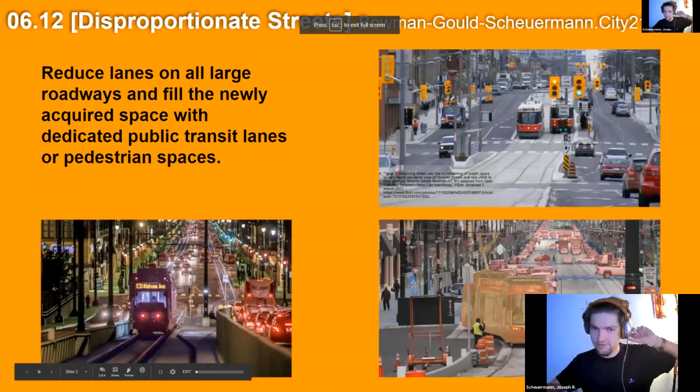Our action statement is to reduce lanes on all large roadways and fill the newly acquired space with dedicated public transit lanes or pedestrian spaces.

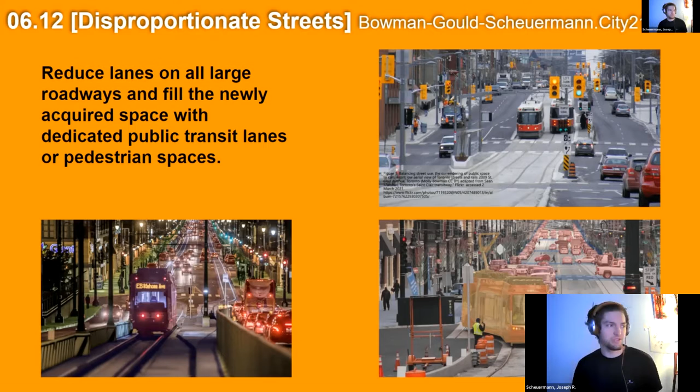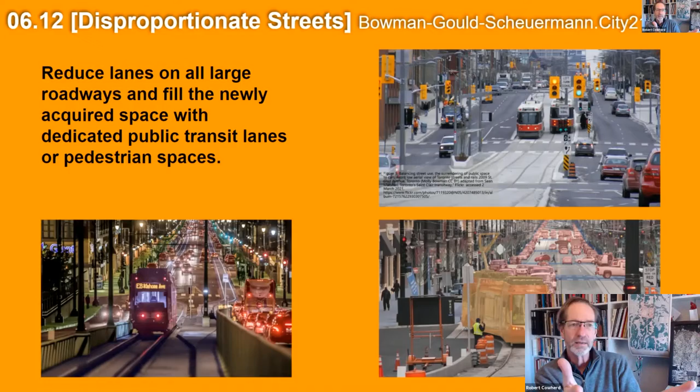Within our analysis, we looked at a bunch of items in the United States and basically noticed... Now you can move on, okay, this slide did its job. We're looking at the evidence, we're looking at the action statement, and it's starting to make sense, but now go deep right away. Okay, got it.

The continued surrendering of public space to cars results in more commuters on the road and decreased pedestrian zones. So when cities prioritize road space and area to vehicles, sidewalks and crosswalks are narrowed to allow more space for the car.

Public transit is great because it allows for more significant numbers of individuals to move through these areas. But when roads are not designed effectively, buses and trolleys with dozens of passengers are stuck in the same traffic as vehicles with one passenger.

To address pedestrians' needs, it's really important to keep them in mind while designing roadways such as these. So my question is, how do we apply the most suitable ratio of sidewalks, streets, and rails to these urban areas?

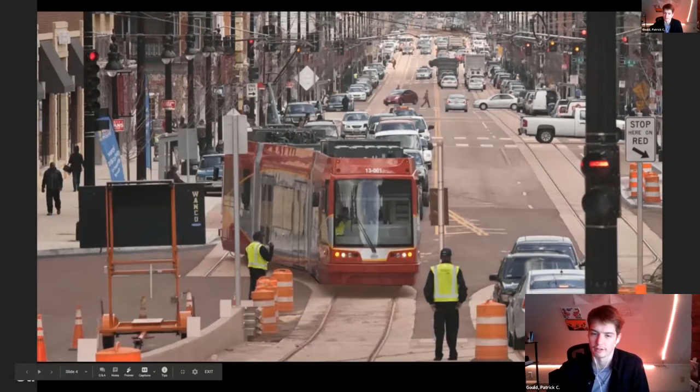And then for mine, I wanted to highlight the width of the road within Washington, D.C., and how the trolley starts to merge within the traffic with cars.

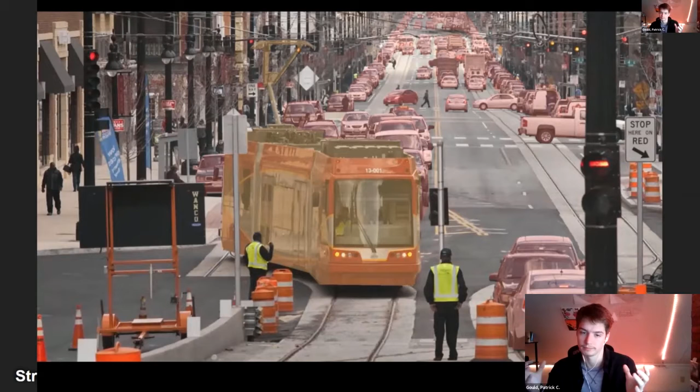There's a high cluster of cars within these roads, kind of pushing all of the people to the edges of the road for traversing, with the crosswalks connecting them.

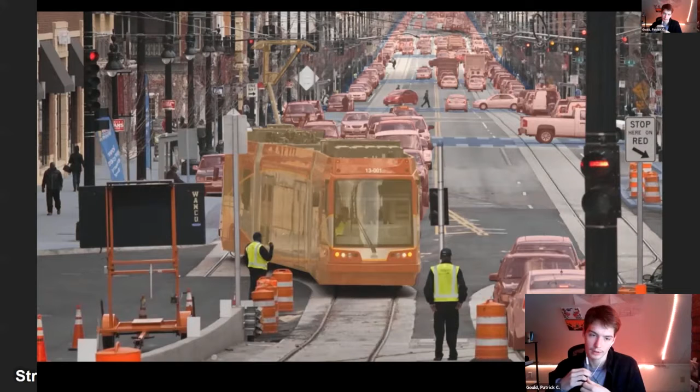Right after this, I highlight that there's no barrier between the two. The greenery and vegetation is kind of gone due to the season, but there's just not a lot of it, so it makes the experience for the passerby less likable.

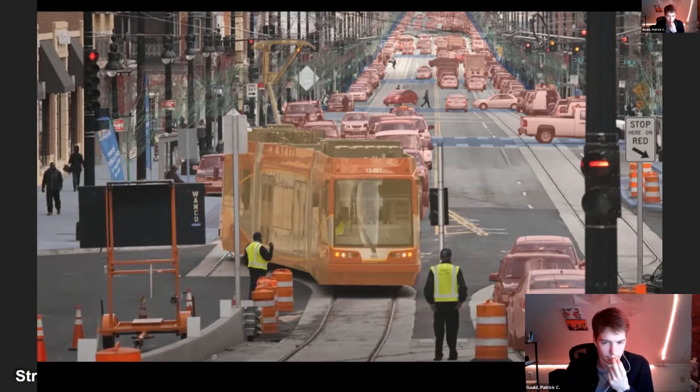So now do we explain this or do we slow? Well, at this point, it's appropriate to say something—not just restate your proposed action step, but somehow in one sentence capture some of the complexity and challenge. Maybe refer to one or both of your questions. Does that make sense?

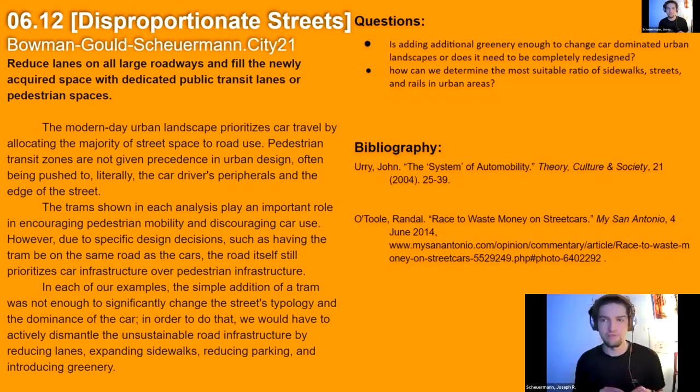I guess one sentence would be that we think it's probably not enough to just introduce trams to roads, but to actively dismantle unsustainable infrastructure, which would mean reducing lanes on roads, increasing sidewalks, and introducing greenery.

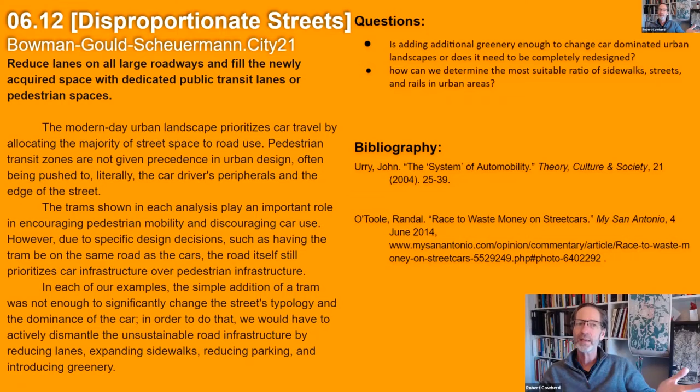So what I'm hearing you say, between the internet cutouts, is that it's not just adding public transit, it's the design of the street space in an integrated manner. So it's a design—so basically hire an architect.

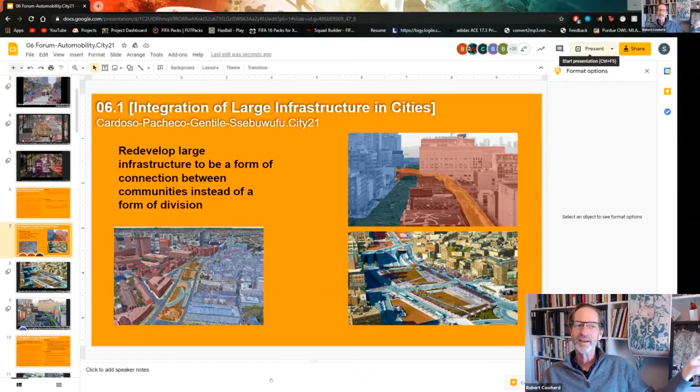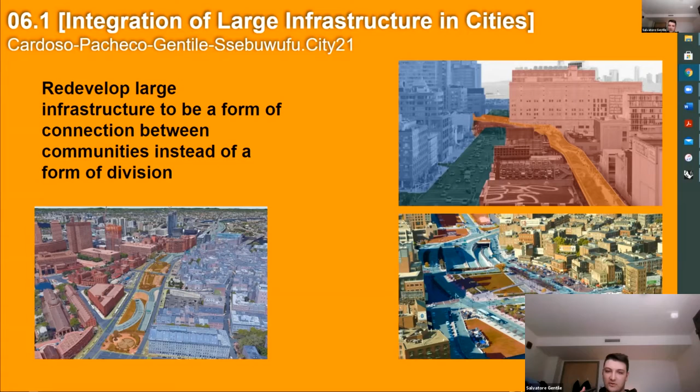So we talked about—go ahead. All right, so we discussed the integration of large infrastructure in cities. Basically, what we are arguing and advocating for is the redevelopment of these infrastructures to be a form of connection between the communities that were once divided.

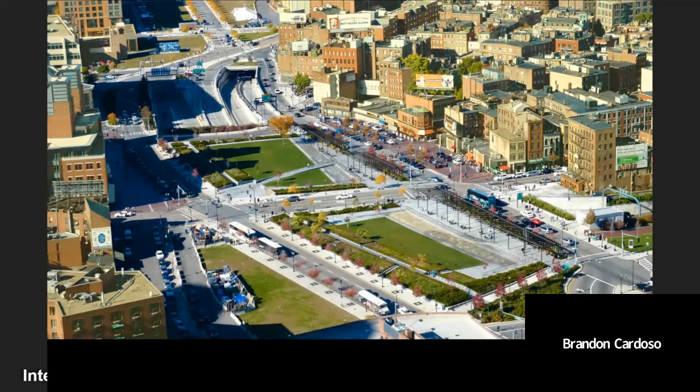So we looked at the Rose Kennedy Greenway for one of our examples, and looked at how it was originally a large central highway that divided the communities within the city. But by placing the highway underground, it allowed a lot of spaces on the upper level to become open public spaces that allowed for a lot of interaction with the people of the city.

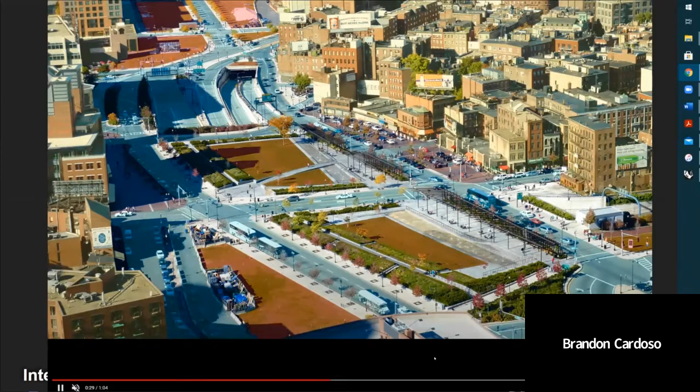This greatly increased the walkability of the site, which promoted a lot of interaction within people, and this all helped to reduce the congestion of automobiles on the streets of the city.

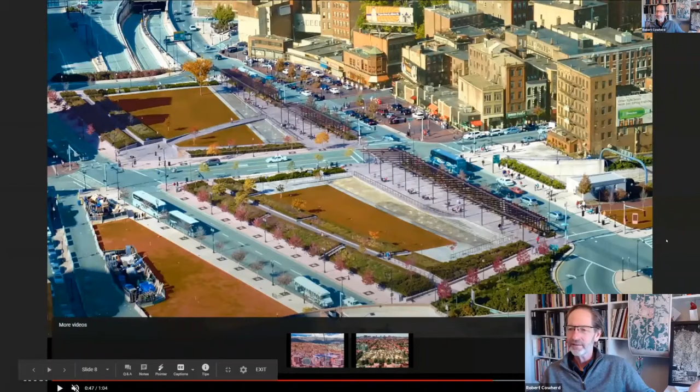Wait, he's cheating, he's zooming in. That is so effective—if I knew I could do that, I would have done it. Can you zoom in? Is that allowed? Yes, yes—one of the reasons we like high resolution images. Well done, Brandon.

Josh, for my video, I looked at High Line Park in New York and how its revitalization brought in new growth to the city in this particular area.

It's moving so slow. Can you move it to like the...

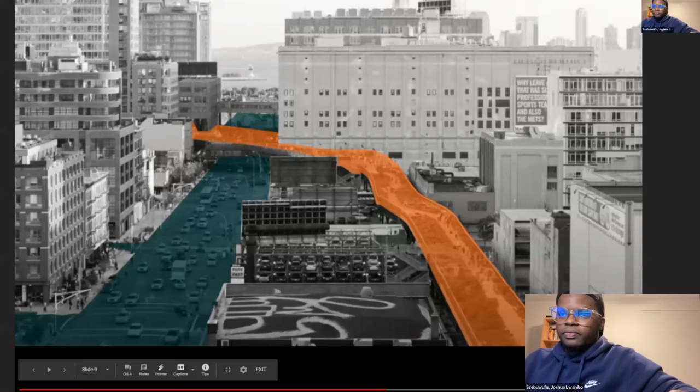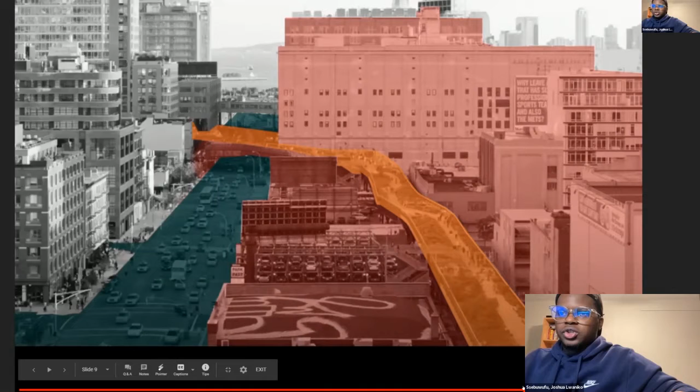So I highlighted High Line Park to show how its revitalization into an urban public park brought an influx of new people and new growth into the city, as abandoned infrastructure of the buildings was redeveloped due to its proximity to the park, into housing that people could go into, as well as new businesses into the area.

Do we get extra points for making 2-minute videos? Do we get double points for 2 minutes? I don't know. No, we actually lose points. It's harder to get it all in 1 minute.

Okay, so to basically sum up, we asked the question: can the redevelopment of these infrastructure projects and new mega infrastructure projects in cities mediate America's dependency on the automobile and serve the community and its environment?

Excellent. Next group. I believe that's us. I'm sure. Colin, you want to start?

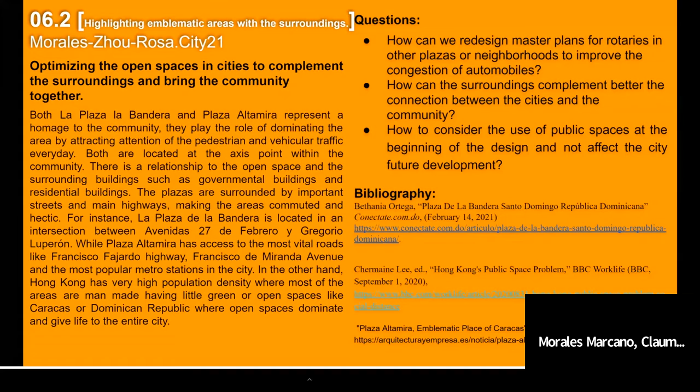Yes, we were talking about how Priscilla and I both have plazas. Hers is in Dominican Republic and mine is in Caracas, and how these open spaces are surrounded by very important highways and government buildings, residential buildings, hotels, and how on the other hand Hong Kong has a very high population density but has little green and open space. So we were discussing how we can optimize these open spaces in cities to complement the surroundings better and bring the community together.

Priscilla, do you want to explain your video? Yeah, sorry, I was muted. So basically this is La Plaza de la Bandera in Santo Domingo. It's like a patriotic monument. I spoke about how people walk into it, or however you drive, you have to actually see the monument, and how the open spaces relate to the monument as well as the government buildings surrounding it.

Doing that. You want to talk about this?

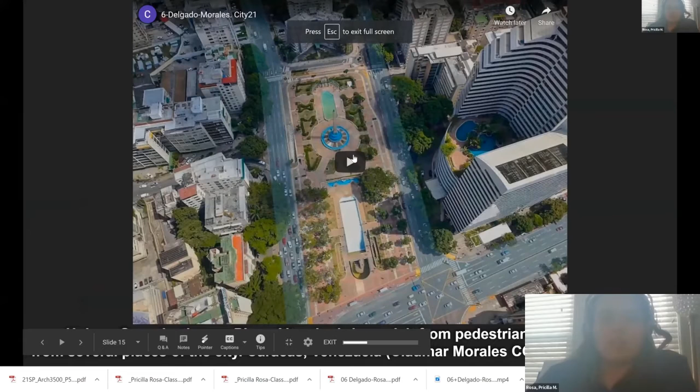Yes, so in my video I talk about how these long streets and highways connect to very important roads and bring pedestrian and vehicular traffic to the plaza. In the center we have the obelisco, which is a very attractive thing in the plaza that brings people together. But the question I asked is how can the surroundings complement better the connection between the cities and the community? Thinking if it's missing a factor, or if the plaza is too big and people need something else to feel attracted to go to that place.

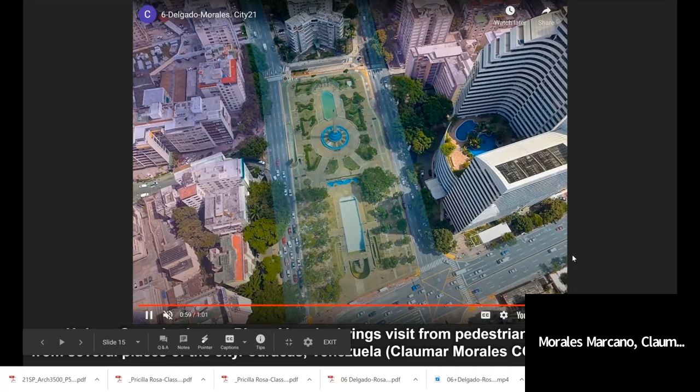I don't know why it's doing this. And lastly, Sharon.

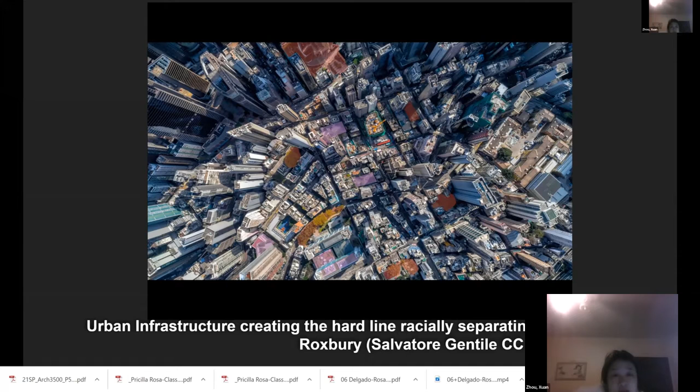My video talks about Hong Kong's public green spaces. You can see the red is provided for the public, and the purple just belongs to personal use. But although you add red and purple, there are just very few green spaces. So my question is: when we design, at the beginning of the design, how do we consider the land for public use without affecting future development?

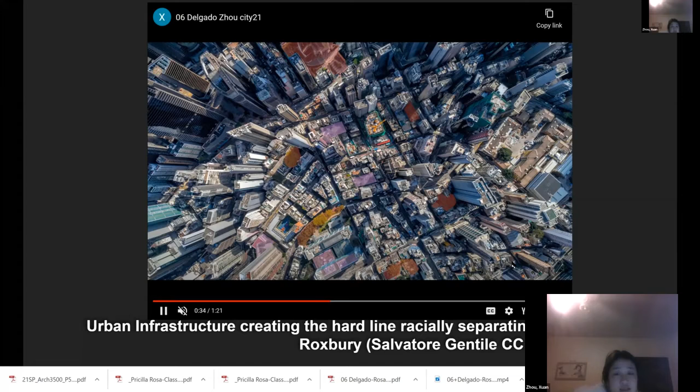Any key question that you three are looking at moving forward to acknowledge the difficulty of this task? Yeah, like how to consider the use of public and open spaces at the beginning of the design, so that it does not affect the city's future development.

Okay, all right, next group. All right. Can you guys see my screen?

So our action statement was to redevelop existing automobile-centered infrastructure with the purpose of creating pedestrian-friendly boulevards.

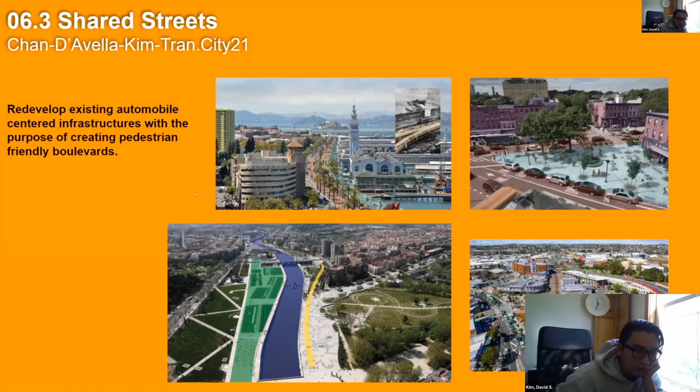This is the city of Madrid, Spain, and what's seen here is that there's a disconnection between both pedestrian and vehicular traffic. So the alternative is to reestablish these areas by converting these highways underground and conserving them to repurpose these areas into public walkways.

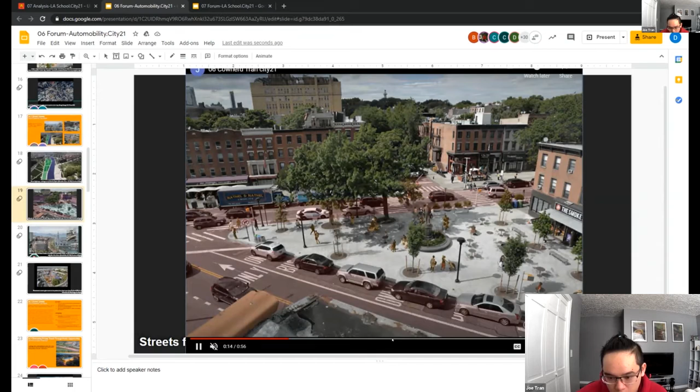This is Fowler Square in New York City. This used to be a really busy intersection with just a small green space. But then they took out part of the road towards the right and gave that to the green space, turning it into a large plaza. Today that plaza is used as outdoor seating for the surrounding businesses and restaurants, as well as a gathering space for pedestrians.

And for the city of San Francisco, in this region there used to be existing highway infrastructure that dominated the land and took up a major portion of the city to accommodate space for car-centered automobile parking and infrastructure. But as soon as they demolished that and incorporated other modes of transit, such as sidewalks for walkability, bike paths, and tram tracks, this place became revitalized and became a point of destination rather than just a means of passing through.

It just spurred the community in that more housing was developed, and creating different modes of public transit actually increases the demand to live in these areas, which also boosts the economic growth of this region.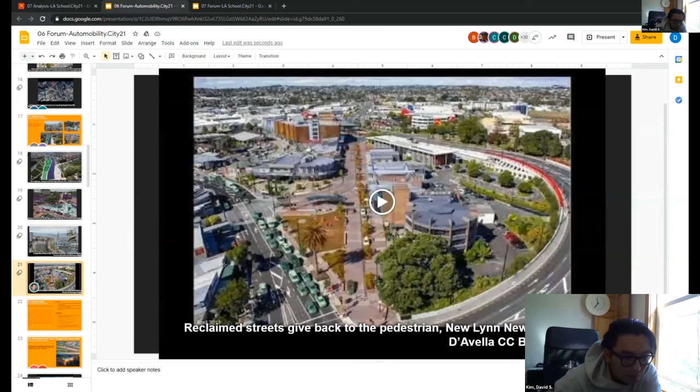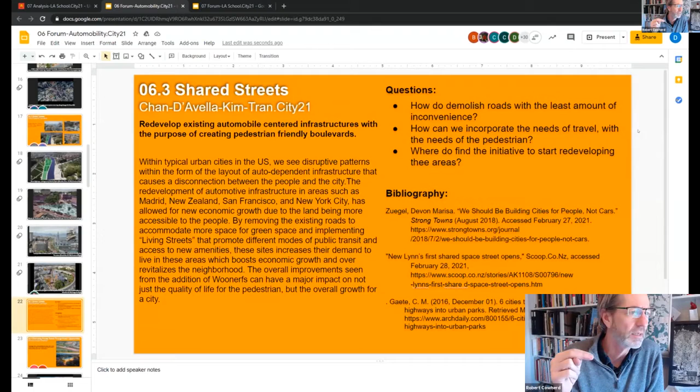So we're trying to limit it to 2 bits of evidence. Okay, I apologize. So maybe in the interest of time we move directly to the next group. Thank you.

Okay, so our statement was: funding public transportation to make it the most efficient and convenient option can reduce private transportation and unite communities.

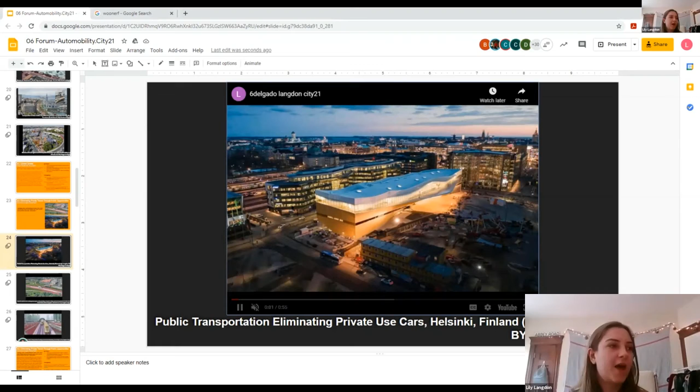So looking at Helsinki, I examined their intense tram system and how they make it an efficient option for everybody. They use that to eliminate the use of private cars, and they've implemented systems to make the trams really accurate, so they're a quicker, more efficient option than using private cars.

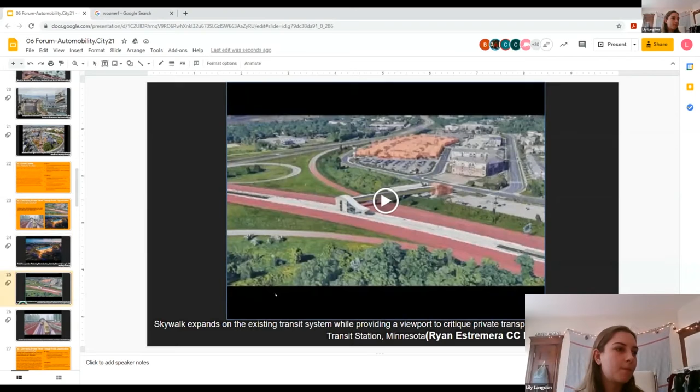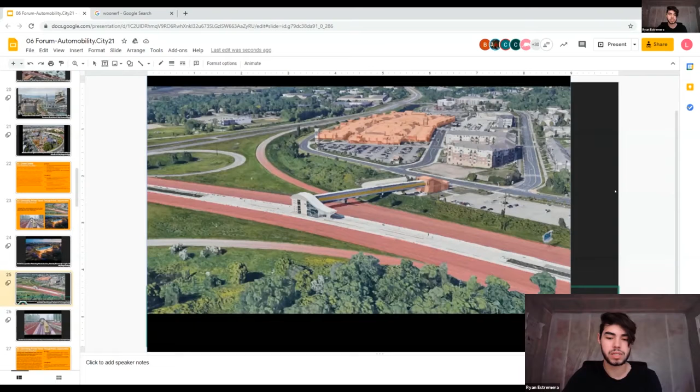Here we have the Mall of America Transit Station in Minnesota. What's iconic about this structure is that it highlights the surrounding outlets, the mall itself, and becomes its own beacon of community. It has an interesting glazing opportunity on either side of the walkway where you can look down into highway and traffic lanes, which almost references the inadequacies of private transportation and incentivizes the use of public transportation.

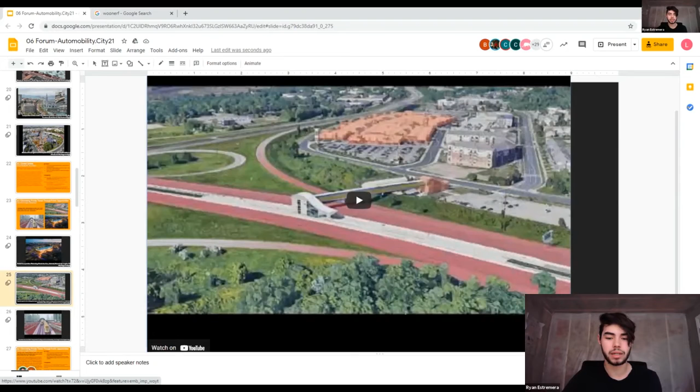This ties back into our main objective of talking about how architecture can create more moments that incentivize public transportation, and can create a dialogue to give better options than private transportation.

Next. Okay, so our statement is: identifying the road users and supporting their different needs will help reduce congestion and pollution, and increase safety.

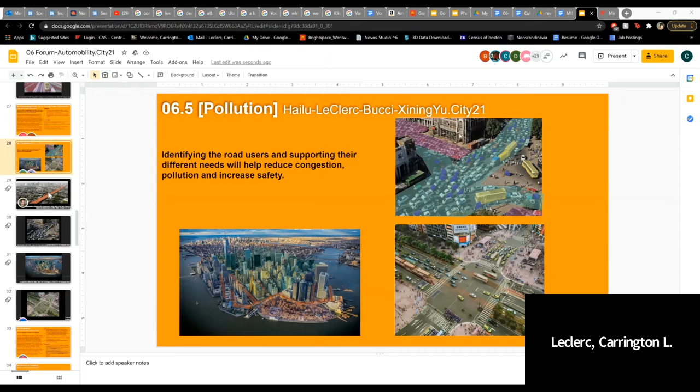Alex, do you want to talk about this, please?

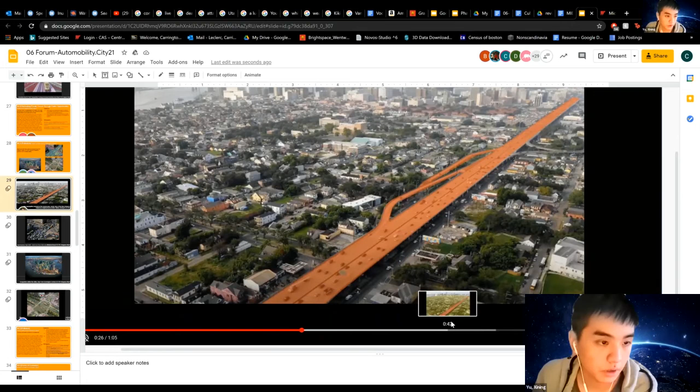This is a highway in New Orleans that was built without the permission of the local neighborhood, and it ended up causing damage to the entire site. It cuts a scar through the site, creating segregation, and the highway replaces public green space and increases the density of traffic, which also causes more air pollution. So the urban site appears unhealthy and disconnected due to the installation of the highway.

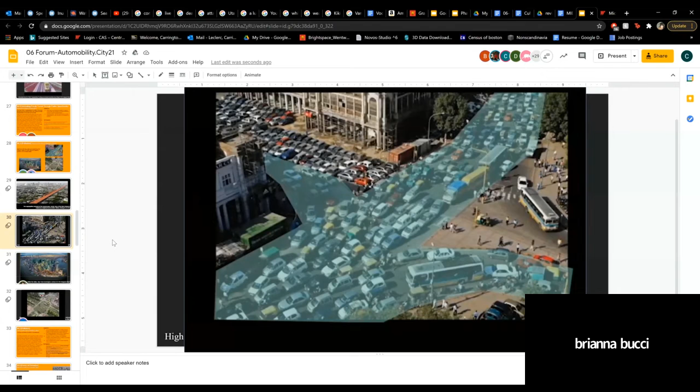I want to talk about population, and how as population increases, traffic and pollution increase, but so does profit, because as population increases, more people purchase personal vehicles, putting more cars on the road. This causes an increase in pollution and congestion on the highways, and means there's no more space for parking.

I also talk about how we should move towards public transportation and how it would decrease the use of personal vehicles and take traffic off the road. If there was a way to increase the eco-friendliness of public transportation, it would be better, as it would increase the number of people walking.

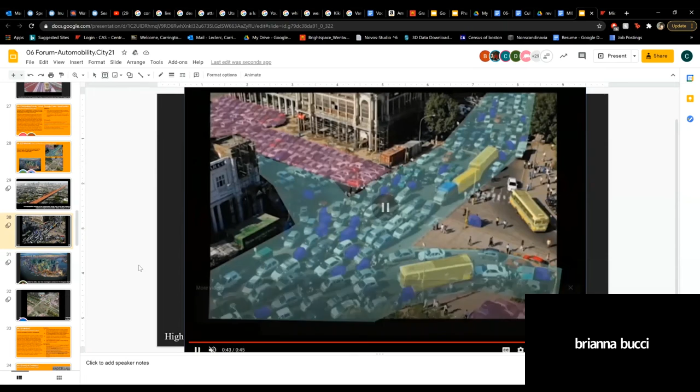So two bits of evidence and then the summary slide? Oh, you want the summary slide? Sorry, yeah, it's okay, it's a new system, we're just working through the kinks.

Okay, this is the summary slide. We pretty much summed up what we said in the beginning, about how pollution causes traffic and stuff like that - how traffic causes pollution, sorry.

It'd be great if you could update this final slide so it includes your improved version of your action statement. Okay yeah, alright, thank you.

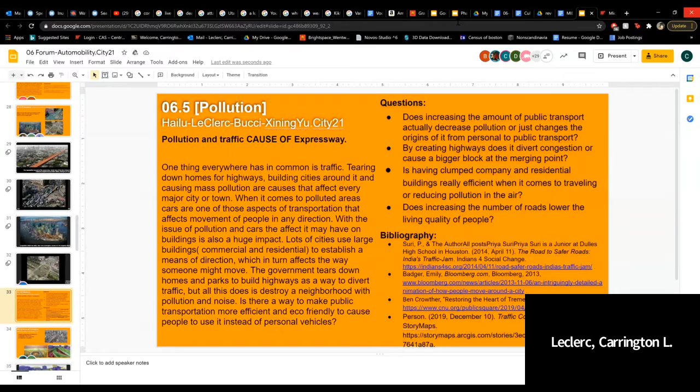Next group: Tony, Carlos, Sophia. Can you see my screen? Yes.

So our action plan is to develop an alternative to freeways, incorporating a new form of transportation within cities, because all of us focused on the different forms of freeways and highways created within our cities and how some of these negatively impacted a city.

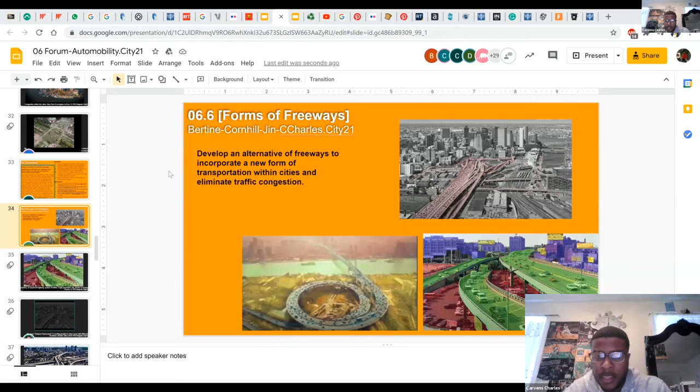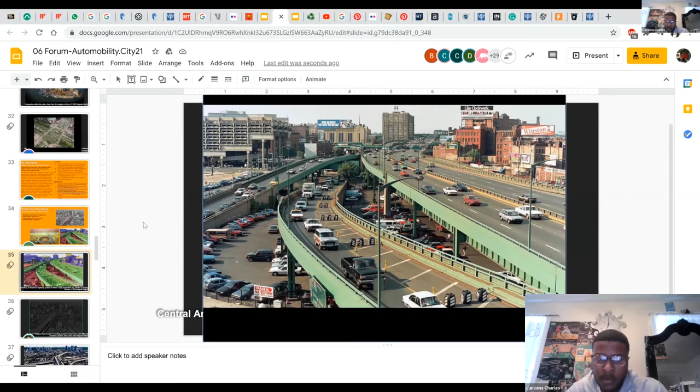So for mine, it was on the central artery of Boston, Massachusetts. The highway that's going to be shown here was considered the worst highway in Boston because of how much cost and money was put into it.

Even though it's spread throughout the whole region of the city of Boston, it still created a bad impact around it and negatively impacted the surrounding buildings, because more buildings were around it but got demolished due to the construction of the highway. So it was negatively impacted and identified as the worst highway.

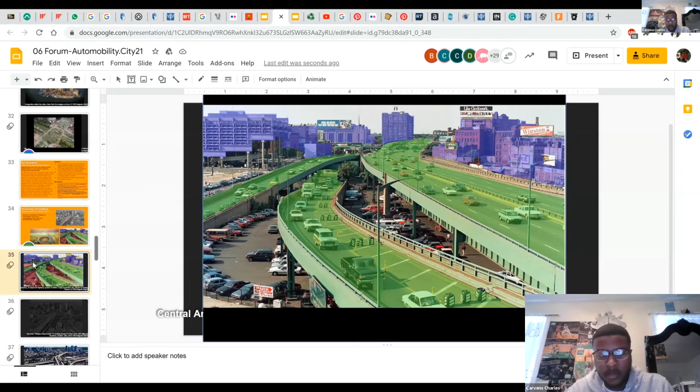And Rex will talk about the positivity of how it was changed.

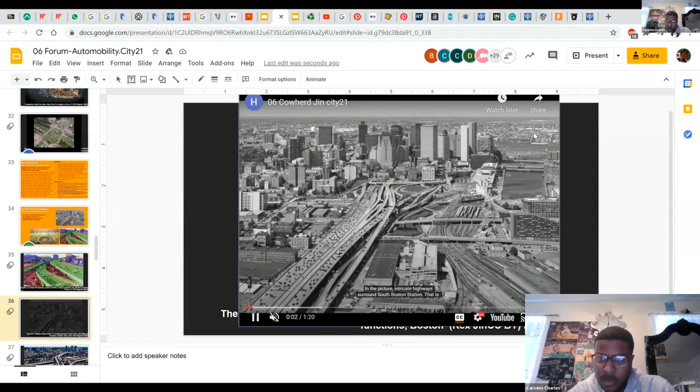Rex, are you there? Yeah, I'm here.

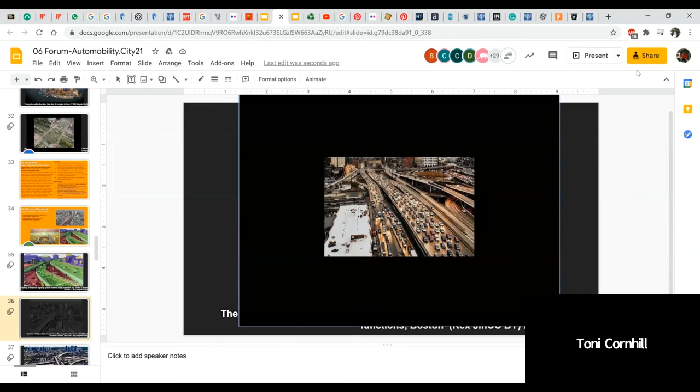So for my part, I chose Boston as an example. Many highways are all connected with different functional areas in Boston, and also connected to the south of the Quincy residential area.

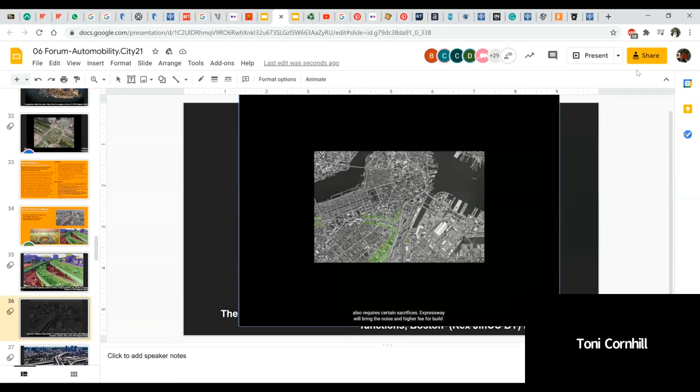But there are still issues because as time changes, the local population grows bigger than before. That brings a lot of traffic to these highways during the busiest time of day, and it also brings negative influence to the surrounding residential areas, costing them more to protect themselves from noise, since the highways make a lot of noise for the surrounding residentials.

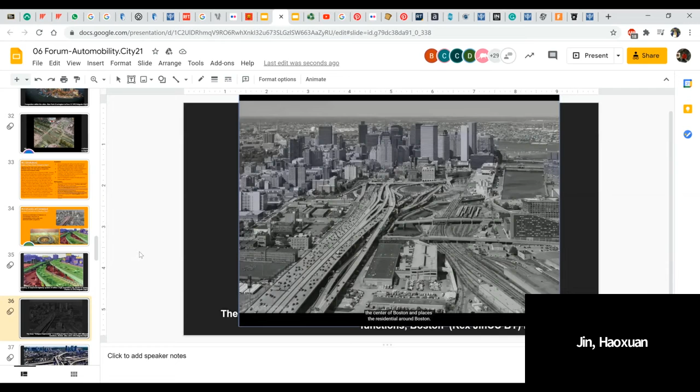The central part will be like South Station, connected with the railway system and also with the highway system. Probably that's it—this is where all our ideas come together.

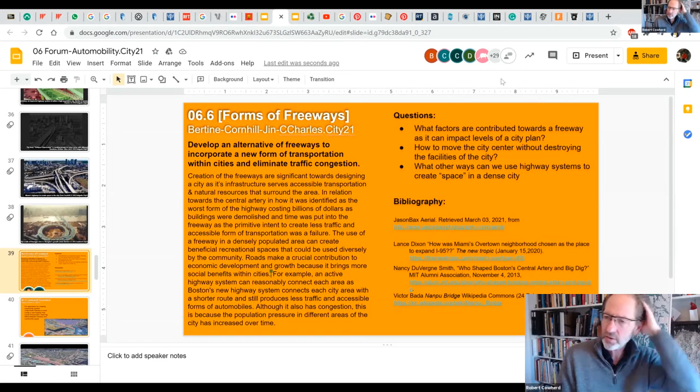And are there any questions that you can hit us with that gets at the complexity of trying to achieve this?

Yeah, there are some questions we still think about, like how the freeways and highways are still being formed within the city.

We're also thinking about how to move the pressure from different areas—separating the pressure from the residential area to new areas, like setting the commercial and political center away from the Boston center and into another place.

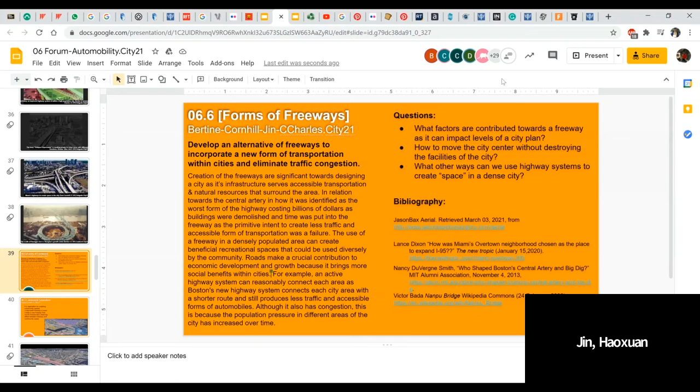And without damaging the old situations and old systems. All right, thank you.

Emily? Yeah, can you hear me? Yes, all right, cool.

So my image was trying to show how to fix the separation between the communities by creating community spaces, either underneath or somehow intertwining or weaving the freeway with these community spaces to make it seem less separated.

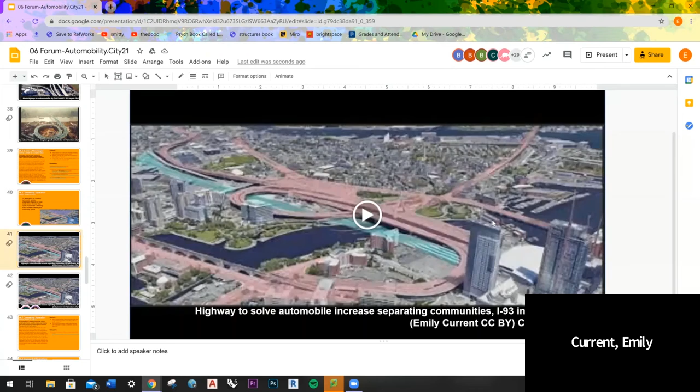It talks about the highway I-93 going into Boston and how it loops around itself to try to keep up with the traffic, along with the automobile increase that has been happening.

But it also has the defect of actually separating three different areas: Bunker Hill, East Cambridge, and West End of Boston. It tries to talk about how we could possibly create different community spaces underneath the bridge or that intertwine with the bridge, so the community spaces are less separated.

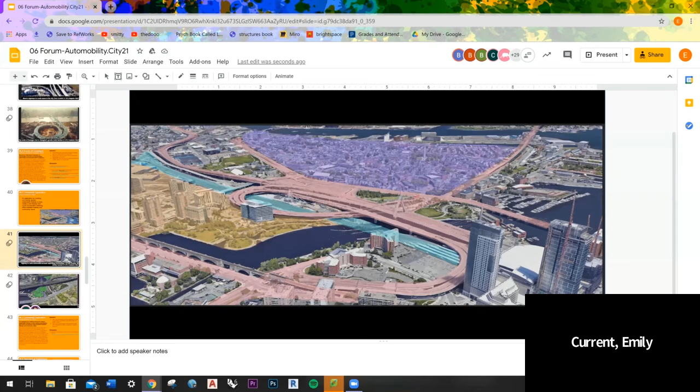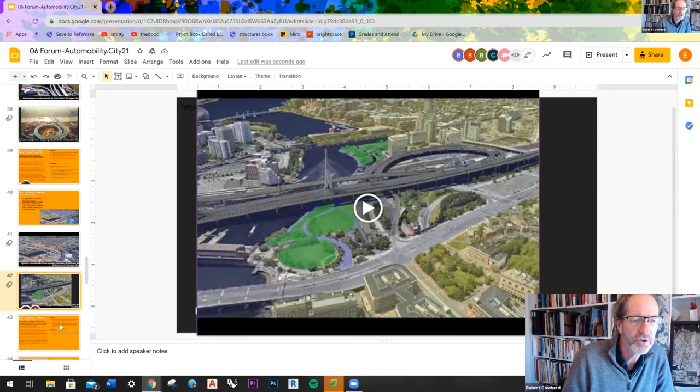Okay, and what are the key questions that would create complications? Some key questions could be how the highway can be redesigned without actually demolishing the entire thing, because it's made of a lot of concrete and stuff like that.

So it would be an expensive fix to have to do.

Good job, despite the fact that you found yourself alone. Thanks. Well done. Okay, extra points for degree of difficulty.

Okay, Kiara and group.

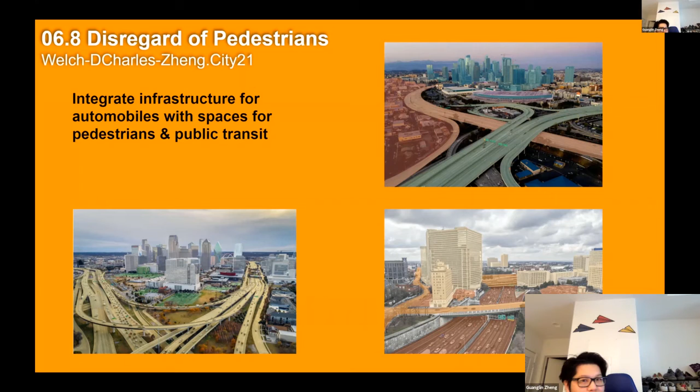So our statement is to integrate infrastructure for automobiles with spaces for pedestrians and the public transit system. The idea of public mobility is lost—specifically to the automobile.

So basically I was showing how the highways I-10 and I-20, where they intersect, take up a huge amount of space, almost as big as the convention center to the north, and how it creates a separation between the surrounding neighborhoods, with no connection for pedestrians to get to downtown, but rather separating them.

So this is the city of Atlanta, Georgia, and I was highlighting the interstate that separates the city as a whole, as well as the secondary roads that create a graded type of structure within the city.

And all of the traffic needs parking lots, so they are abundant, as well as having the high rises tucked between the parking lots and roads.